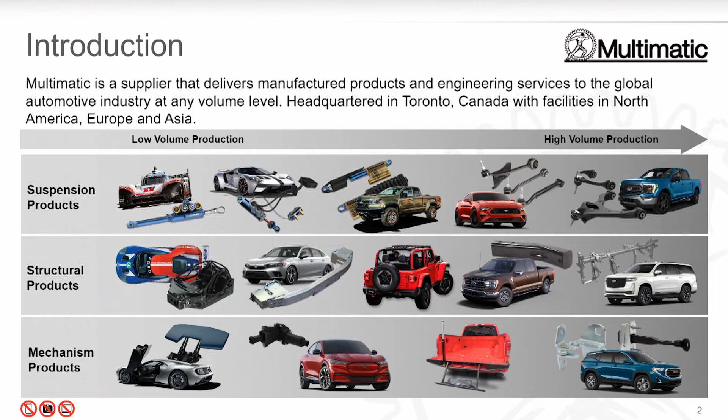So MULTIMATIC, you've probably seen all of our stuff around the building. You've been wandering around. We make high volume products, we make low volume products, and we build low volume niche vehicles for people. That basically sums up the overview of the company. Suspension, structural products, and mechanism products are our bread and butter. In the simulator world, it has applied mostly to our engineering projects and the support of our own portfolio products in the suspension realm. So control arms, dampers, and other suspension systems we do.

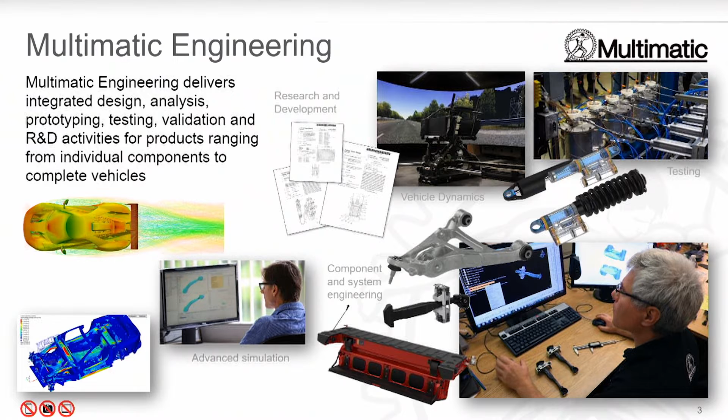The engineering side of the business, which I work for, we are responsible for engineering the high volume products, everything from hinges, control arms, and full vehicle design. We are also available for third-party engineering contracts, so we do a lot of exclusive vehicle development programs for people. They just need help with development, whether that involves simulation or goes straight to physical development, depends on what the needs are. So we basically run the full gamut of vehicle development, vehicle engineering, vehicle simulation stuff with a strong bias towards the vehicle dynamics side of things.

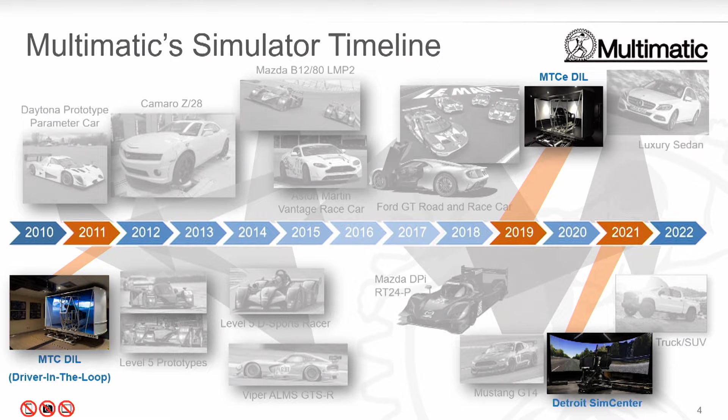Then 2021, this facility opened. It should have opened earlier, but COVID got in the way. So by the time that was all done and dusted, this facility here that you've been walking around, the DIM 250, opened in 2021. So we've been involved with driver-in-the-loop simulators for quite a long time, and we've learned quite a lot along the way about what you can and can't do with them so far.

So we have what we call the MISA, MULTIMATIC Integrated Systems Analysis approach to all our engineering projects, whether it's a small hinge redesign or a full vehicle program. Basically, it's an overview of applying the right technologies in the right order at the right time to achieve the optimum results with the minimum timeline. So increasingly, the driving simulators have become a bigger and bigger part of this process, and we use them more and more on an increasing range of projects.

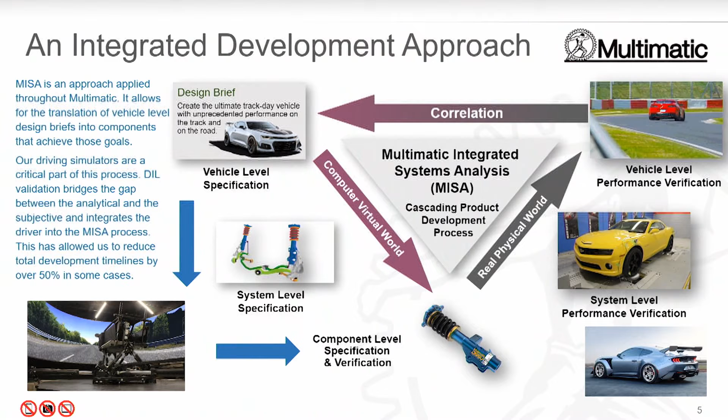I mean, for the pure vehicle dynamics development projects, obviously, a simulator is a very useful tool. But we've been beginning to expand them into some of the control arm business we do, some of the other suspension parts, twist beam developments, that kind of thing, actually driving different designs in the simulator to look at the performance of component level optimization, how the parts we make are going to affect vehicle performance. So it's becoming a more and more integral part of a bigger and bigger chunk of our business.

In terms of road car use, the Z28 Camaro with our spool valve dampers on, the first production implementation of the spool valve damper, that was really the first road car that I was involved in that we tried to do some work on the driving simulator. And so we had decent success with Nürburgring and VIR in particular, Virginia International Raceway circuit tuning activities.

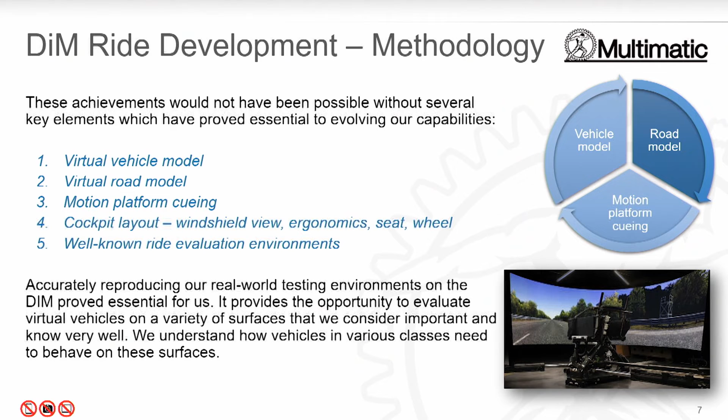So we embarked on this whole development process, which we talked about a little bit here, the model and the road and the platform cueing, till we could accurately replicate the differences between modes, tell the modes blind, and at that point you think, okay, there's something here. We can now begin to do ride development on the DIM.

So when I put this presentation together, I didn't realize we were actually going to run this exact thing in the DIM today. So many of you may already have seen this, but this is an iPhone video looking out the windshield of our DIM on one of our many UK roads. That's why we're driving on the left.

But we've scanned many of them. We know how cars need to behave on this road in real life. So we tune vehicles to feel like it on the DIM. And we've now got pretty good success in having cars that we build to DIM-developed specifications driving in a quite similar manner.

So here in Michigan, we use, again, a number of routes. It's kind of ironic that always happens. Our section of 696 that we know and love for mid-frequency ride performance. Anyone that tried to get here from east of here will have noticed that it's completely been dug up. So that's another of our ride surfaces disappeared. But we still have it in the DIM, and we'll still continue to use it. But now we just have to go a bit further east through Royal Oak to get the same kind of choppiness content.

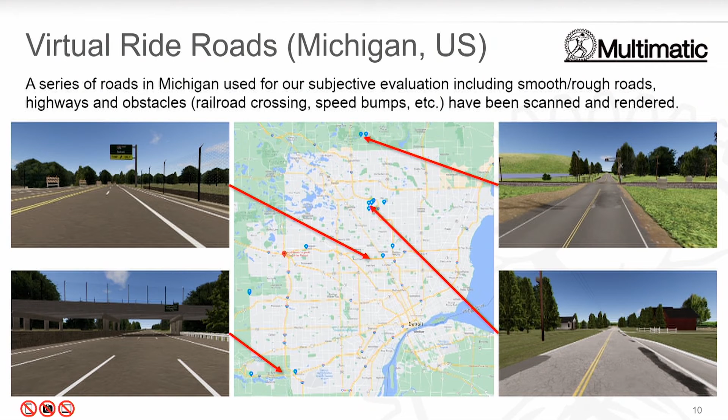And this is Gunn Road up in, I guess, Auburn Hills or Lake Orion. I'm not sure where it is. Up near Bald Mountain, which is just a broken surface, lots of primary ride input, which is fairly hard to find around here. Broken surface is very easy to find around here. Roads with significant primary ride input are less so. So we've got that scanned for that specific purpose.

That car runs our ASV adaptive damper system, significant aero, slick tyres. It's a very, very serious car. It is going into production with damper curves and ASV calibrations. ASV is our adaptive spool valve. Damper curves and adaptive calibrations developed 100% on the DIM. We didn't just trust it and put them in the car and sell it. We evaluated 3 or 4 different options that were developed on the DIM in the vehicle with several racing drivers, and everybody chose their favorite, and we came to a consensus.

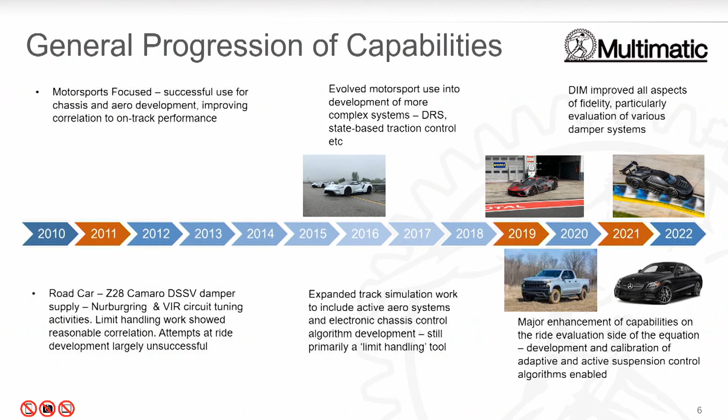And that is the first car that we've ever done that will go to production, albeit only 67 cars, with a 100% DIM-based damper system on it, which if you'd asked me 5 years ago, I'd have said you'd never do it. Even on a car that's 100% track-based, which gives you the best chance of doing it, I wouldn't have had confidence that you could do that 5 years ago. But now, that's the reality of the situation. That car will be on sale with DIM-developed damper settings in it.

Through that, I guess you'll have concluded we've already had pretty good success enhancing our ride capabilities on the DIM, in addition to the handling level stuff. Further enhancements are ongoing, critical to continuing the evolution of the process. Audible ride content, which is massively influential on impact harshness perception. You may have had a go in the VI-grade static simulator, and they're heavily involved in moving that part of the game along quite successfully. So that's in hand.

Enveloping tyre models, everybody's working on those as well. It's the first layer of isolation between you and the road, so clearly massively influential on how the car rides and the higher frequency stuff, secondary ride. So that's evolving and needs to, and will continue to do so.

So in the off-road vehicle arena, you see the little video playing down the bottom. There are 2 issues there mainly that we found with replicating it on the DIM or any simulator. One is the deformable surface to tire interaction. That's still a developing technology, and people are working on it all the time. The second is how you manage the motion cueing when the vehicle is moving in reality outside the physical capabilities of the platform itself. So that's something we're working on. We've had some success with it.

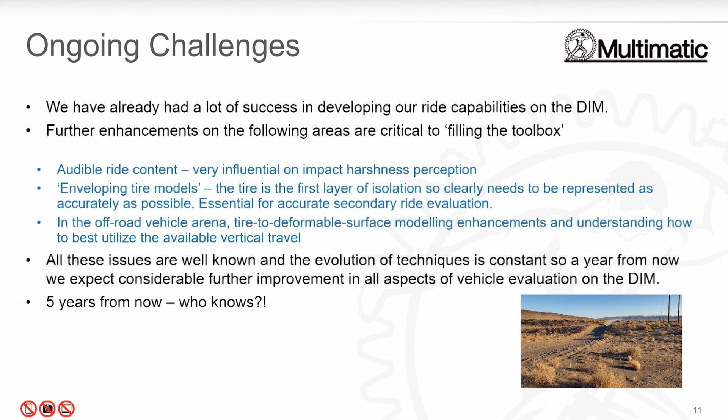It's really a case of understanding the offsets and what you can and can't do. That's where we're at. Other people may be further along in that game. Or probably simulators will just gain more and more motion. Lateral and longitudinal motion is increasing all the time. VI-grade keep coming out with bigger and bigger DIMs, so maybe the vertical capability will also be better matched to this kind of vehicle, which is fairly niche, admittedly.

So a year from now, all this stuff will have progressed further and we'll be able to use it even more. 5 years from now, who knows where we'll be. Zero prototypes is a lofty goal, but several of the big OEMs have announced that's where they're headed, so we better figure it out. So, all right, that's it.